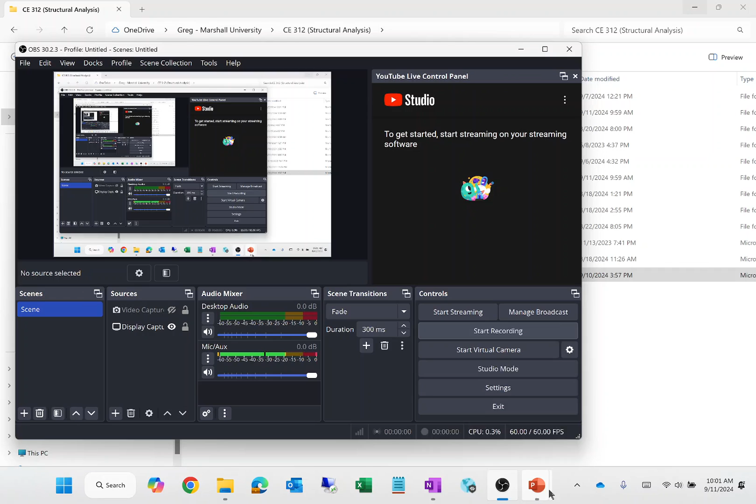Is this gonna turn on? There we go. Okay.

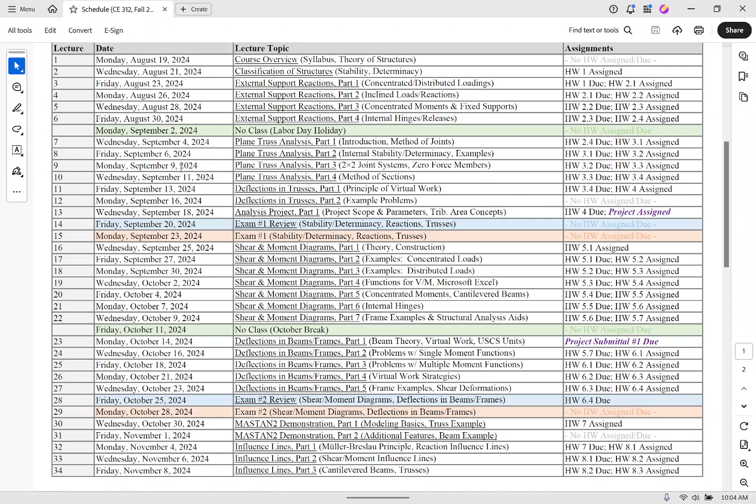Just so you are aware, there are 2 submittals for the analysis project. One of them is due Monday, October 14th, but when you see how much work you have to do for that submittal, you'll realize it's very minimal. It's really not a lot of work. The bulk of the work for the project is during the submittal 2 phase, and submittal 2 is right before Thanksgiving break.

The project will be open on Blackboard for a long time, so if you submit it early, that's fine. That Friday before Thanksgiving break, we're just going to have a Q&A session in case anybody's having trouble with their project. Most students are able to complete it very easily, but if you're having any problems, that's usually what we're working out that day. And I'll have it collected by 5 p.m.

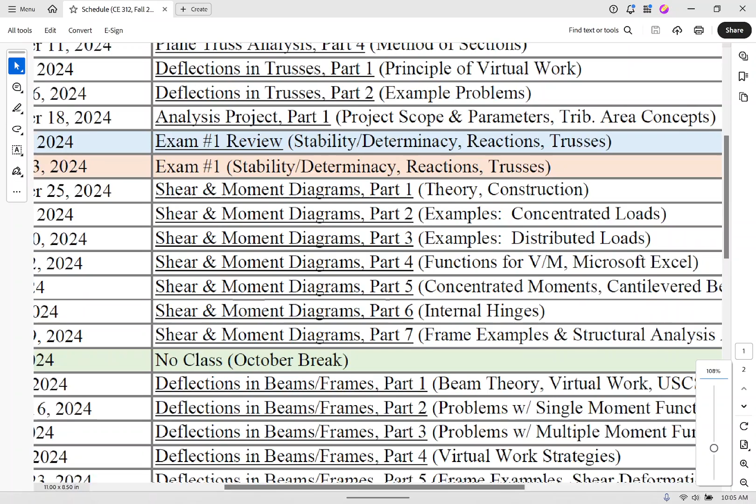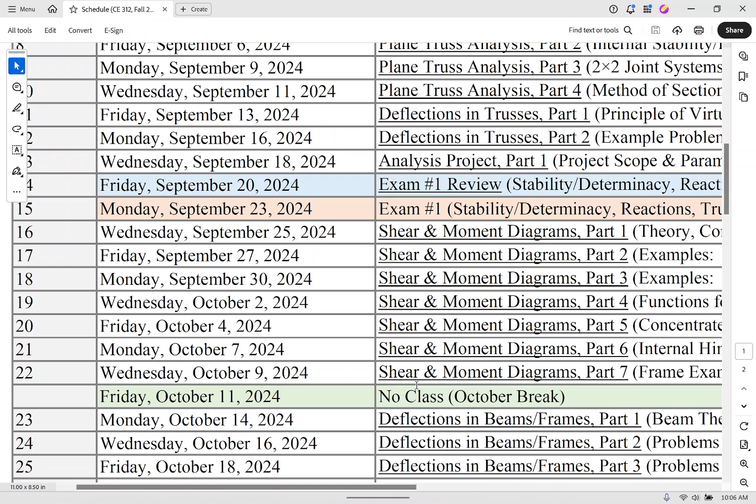So we are going to be looking at the method of sections today. I've been talking about the method of sections quite a bit, but we haven't used it. I said we'll explore this one later. It's now later. We still are dealing with the same assumptions in truss analyses: the idea that all the members are connected by frictionless joints, all the loads and reactions are applied directly to the joints, and the centroids of all the members coincide at the point where the joint is. So what that means is that every member is an axial force member.

Now, let me go back and say one thing. When we did the method of joints, we were limited to joints with two unknowns. Why were we limited to joints with two unknowns? We only have two equations of equilibrium. But let's go a step further. Why do we only have two equations of equilibrium? Well, we have two equations of equilibrium because all the forces meet at a common point. If all the forces go through a common point, there's no moment, right?

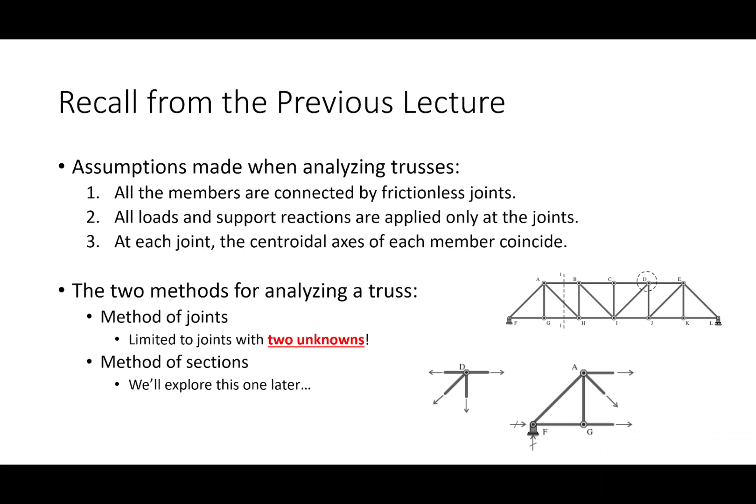Remember, a moment is generated about a point when there's a force whose line of action is some distance away from that point. The moment generated by that force is the magnitude of the force times the shortest distance from the line of action. So if the line of action goes through the point, there is no moment. That's not the case with the method of sections. With the method of sections, you're going to have forces going all over the place. So the added advantage of the method of sections is that you are afforded another equation of equilibrium.

So whenever you apply the method of sections, you can cut a section through at most 3 unknown members. To be clear, you could cut a section through like 5 members, that's fine. But if you just wanted to apply the equations of statics, you have to know 2 of the members beforehand. The method of sections will allow you to solve for 3 unknown members because you have an added equation of equilibrium. Does that make sense?

Now, let's talk about when to apply the method of sections, because as a structural engineering professor, I focus my educational efforts for you all on the method of joints. My reasoning is that when you're a structural engineer trying to design a system, you need the forces in every member: every tension member, every compression member. You need to know what's going on in the entire truss because you ultimately need to size the whole thing. So the method of joints, while tedious, is thorough. It will give you the whole solution.

The method of sections is not really intended to do that. The method of sections is important if you only desire the forces in a couple members. There are a few practical applications when that would be important. For example, if you're spot checking your calculations and just want to make sure you're getting the right force in this member, maybe it's easier to just cut a section as opposed to solving the whole truss. Or if you're checking another engineer's calculations: engineering calculations must be able to withstand the scrutiny of an independent review.

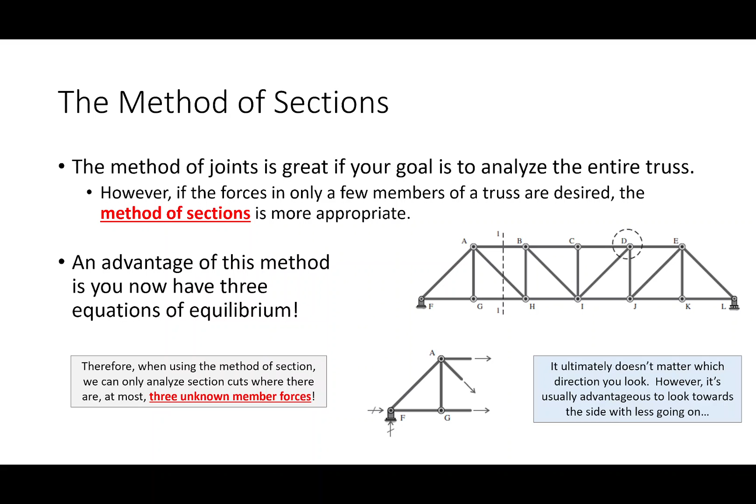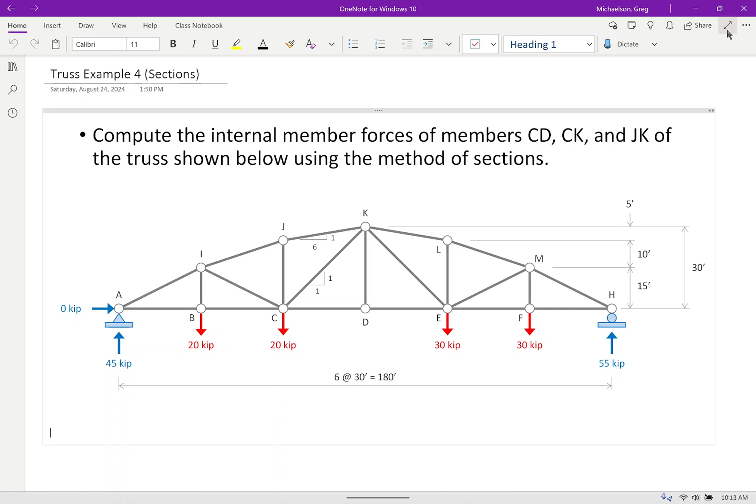Okay. So I want to do this example. This is the method of sections example we're going to do. Let me pull up the notebook so I can prevent all the screen changing. Let me make this a little bit bigger. Now we're going to determine the forces in three members, utilizing the method of sections. So first off, let me break out my highlighter. What's up? Okay. That's actually not a bad idea because this is a big truss. If you want to turn your notebook sideways, that's fine.

Oh, I hope my voice didn't come out muffled over the past 10 minutes because I had my notebook over the microphone. So, apologies to the YouTube audience.

I blame Raid Shadow Legends. So, please don't sue me, Raid Shadow Legends. That was a joke. No, it's not. Video is sponsored by HelloFresh.

No, okay. All right. So we're going to highlight the three members we're going to solve for, which are CD, CK, and JK. I think it's not a leap to suggest that when we break out the samurai sword or lightsaber, this is going to be our section cut. And typically what I will do is something like that. So I'm calling this section 1-1.

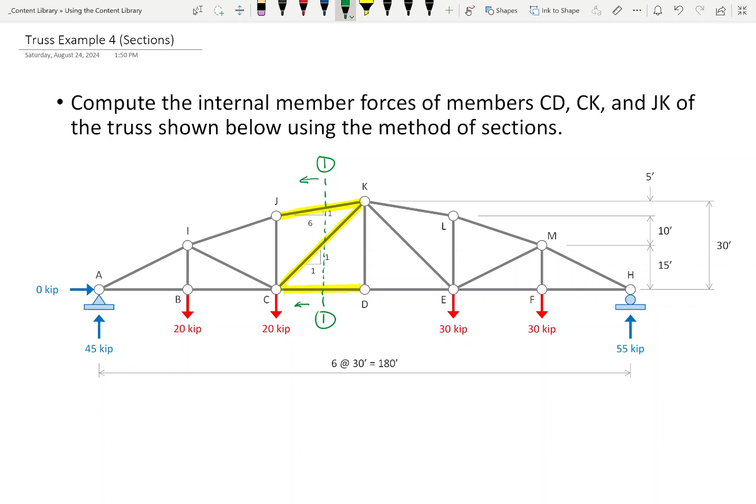So I'm going to look this way. So I'm going to cut a section and look to the left. And unfortunately, and again, this is probably the thing about the method of sections that students enjoy the least, is that you just kind of have to draw stuff over again. And let me be clear, you don't have to.

But when you're first doing this, I'm telling you that I have, as somebody who grades these problems, found a pretty direct correlation between students who do well on these problems and students who take the time to draw everything out. The ones who make mistakes are the ones who say, I don't need to redraw it, and then they forget an arrow or they forget a direction. So go through the process.

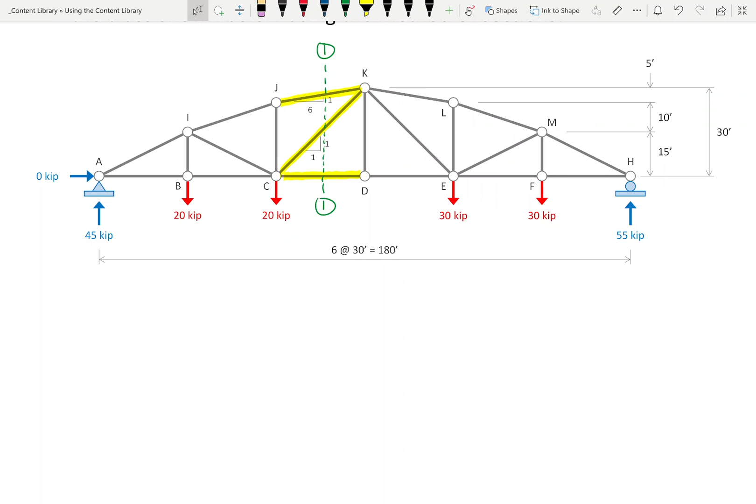All right. So what we're going to do is we're going to cut section 1-1, and we're going to look left. Excuse me. Okay. So let me see what I can do here. I'm going to try and keep my sketch as neat as possible.

All right. Okay. So we'll do something like this. And let me show you how I'm going to draw this. All right. So what I'm going to do out here is I'm going to say like this.

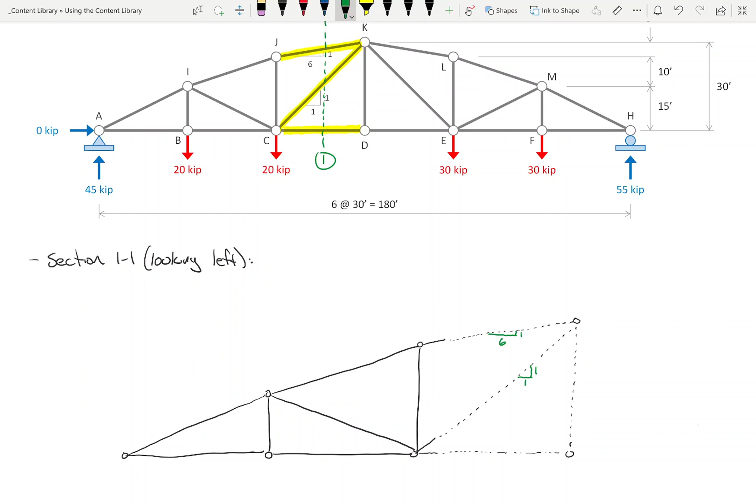The next thing I'm going to do is that, and that came directly from the problem. It's at a 1-to-1, that's at a 1-to-6. All right. See if we can put some forces to this. We have that. Notice how the reactions are not equal. This is 45 and this is 55, and that's because the loads are different. This is 20 and 20, that's 30 and 30.

So if we were to apply a method of joints or method of sections analysis, we would need to solve the entire system, right? We could not solve just a little bit of it. So something to keep in mind. All right, so now let's start labeling dimensions. Let's do that now before we forget. This dimension, this dimension, this dimension, and this dimension are all 30 feet.

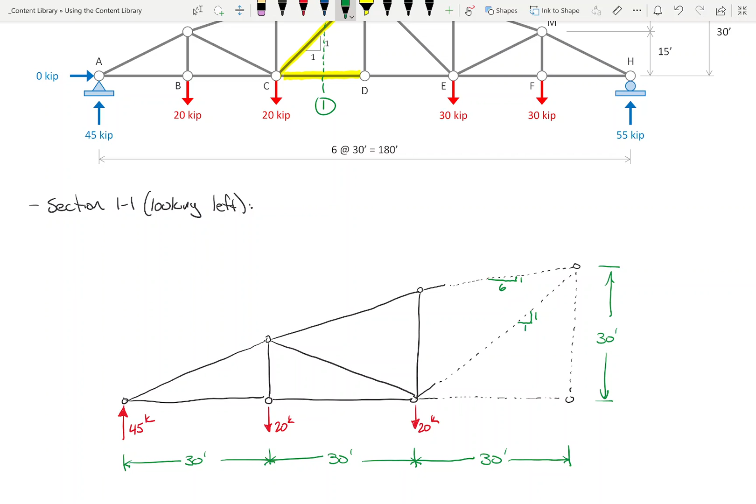This dimension here is also 30 feet. This is also 30 feet. And I'm going to scooch this over a little bit. There's a reason why. That's also 30 feet. And, oh, I didn't put labels. So this is A, I, J. This is joint K, B, C, and that's D. The joint labels there.

We also need to indicate that this is 15 feet. And that's 10 feet. Okay. Did I get everything right? Any of my dimensions incorrect? I haven't put my unknowns on there yet, so we need to do that. But so far, so good. Is my truss drawn accurately? Or my section cut, I should say, because that's not the whole truss, that's only part of the truss.

So now I'm going to put my unknowns, and I'm going to assume that all the members are in tension, okay? I'm doing that just to make my life a little easier on the math. Because I assume they are all in tension, any negative answers will be in compression. Because I'm going to have a lot of unknowns, let's just deal with that now.

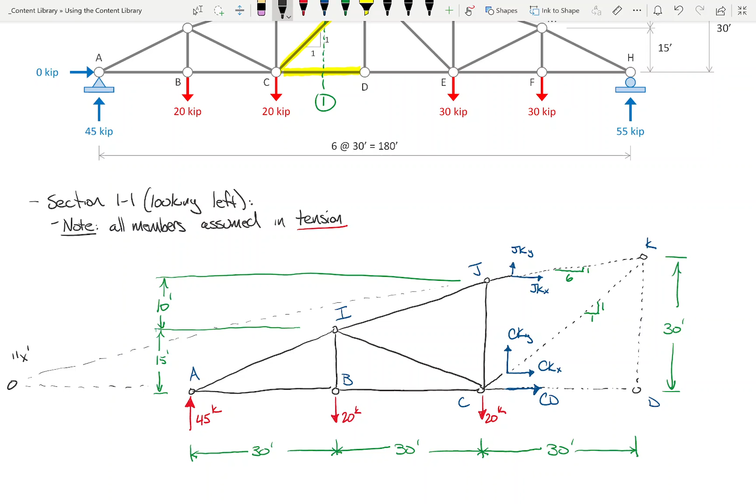And that's this point right here. The point at which this and that cross. We could sum moments right there and get rid of this and that diagonal, right? It would work, wouldn't it? And that would solve for this one, right? So there are three, okay? So we'll call this X. All right, so let's talk about this.